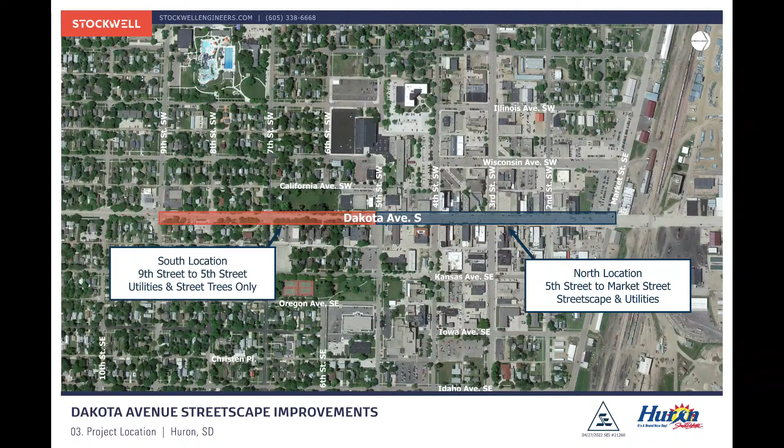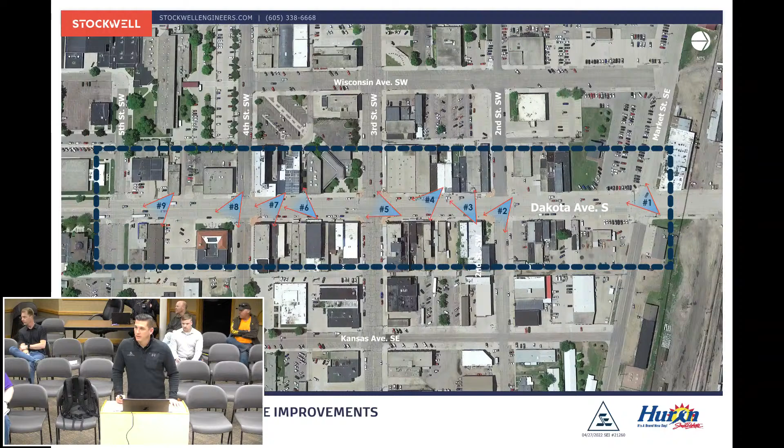So just a quick recap and look at the downtown area. You guys are all very intimately knowledgeable of the downtown area, so I know these pictures aren't any surprise to you. But just, again, from a public standpoint this evening, to reorient people: we're looking at downtown Huron, buildings coming up all the way to the right of way, giving you that sense of enclosure in your downtown area, shop windows. We know there are overhangs, there are signs.

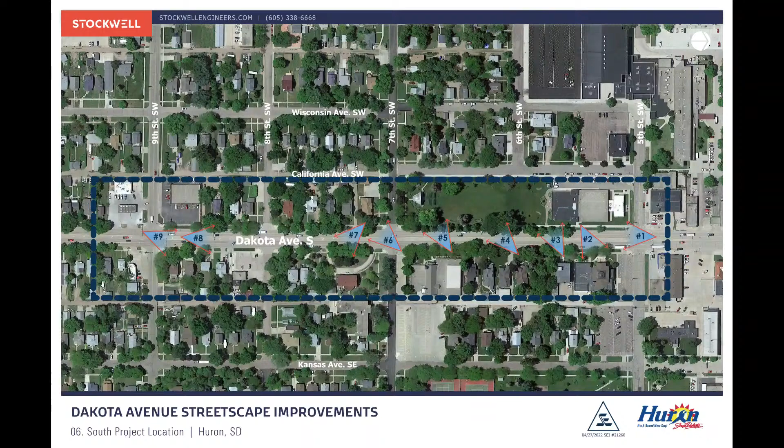Downtown is busy, and so the design will need to be accommodating to that. What we're going to look at here is more of a one-block prototype that will be specifically applied from block to block—whether it's signage that we need to make sure we're not in front of, or basement protrusions. There'll be different elements in each block that are unique that we're going to have to work around, and we're certainly going to be doing that as part of the design. The area we're looking at is from 5th to 9th Street.

This area in particular, people really like the tree-lined drive, and that's probably the biggest item of contention with a lot of people. So as a part of this project, we want to help re-tree this corridor.

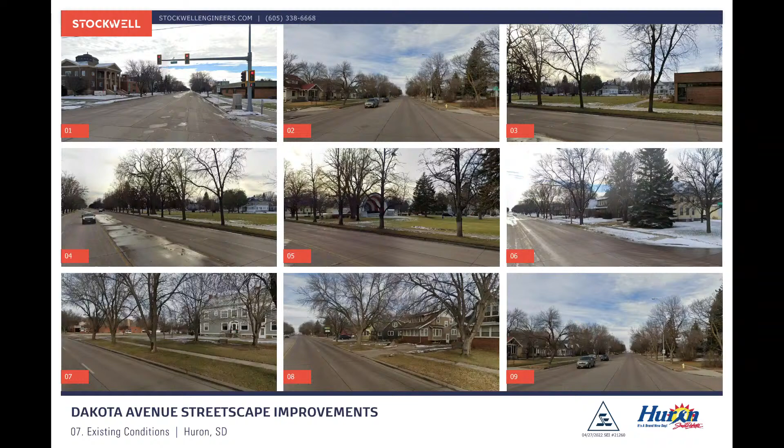We're going to be showing where we're starting to preliminarily think about where those trees go, but also looking at what types of trees are going back. We want to make sure we have a good, diverse urban forest.

We don't want to run into a situation like a lot of South Dakota is in right now with green ash. It was a variety of tree planted very heavily back in the day, and now with the emerald ash borer, entire corridors and parks that people thought of as forested are now not. So when we replant this corridor, we want to make sure we're coming back with a variety of different trees.

Sienna Glen maple provides some nice red fall color, because a lot of the trees that are hardy and do well in this area typically have a lot of yellow fall color, so we want to introduce some red. And then Triumph elm—there's a variety of hybrid elms that are Dutch elm disease resistant, native elms, very adaptive. We've had very good luck with a variety of different elm trees that would be installed as well.

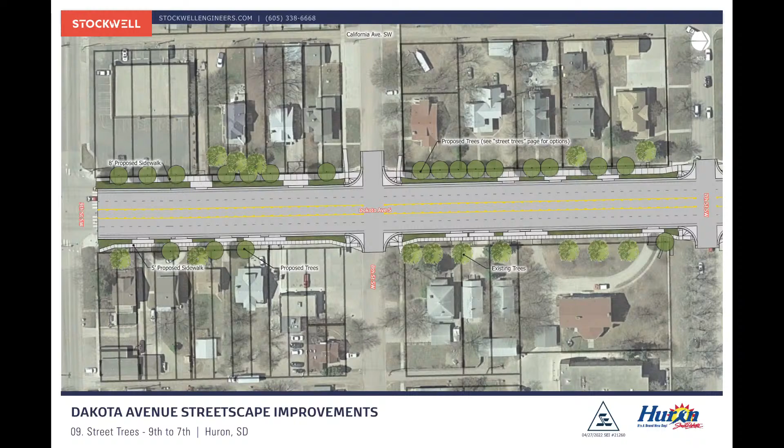And as for where we're putting them, we're starting to conceptually lay this out so we can begin the conversation with the different property owners along the way.

On the plan, the left side—the west side of Dakota Avenue, top of the slide—there's going to be a widened sidewalk on that side, and trees will be placed closer to the different property owners. That's an agreement we'll need to work out with property owners regarding planting right at that edge of the right of way, just on their property, to start growing back that urban canopy that comes down Dakota.

On the east side, we're doing a not quite as wide sidewalk, more of a typical sidewalk, which allows more space between the edge of the sidewalk and the right of way. So there's a little more room to work in terms of planting trees on the back side of the sidewalk on the east side.

Again, we're going to be upfront and work with the property owners on that, because if a property owner is against it or not going to take care of the tree, that has its own issue—we don't want to plant trees that are set up for failure. So we want an open dialogue with people as we think about where those trees happen along the corridor.

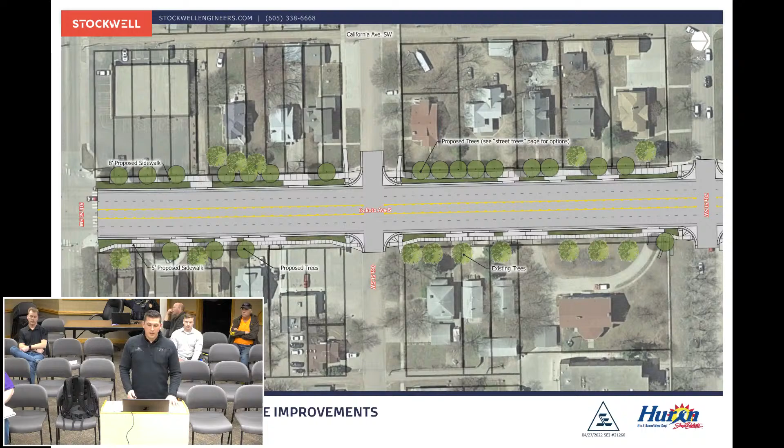Right now, you've got a tree every 30 feet or so going up and down Dakota Avenue, which is pretty tight spacing, but that's also what gives you that sense of enclosure as you drive down it.

So we did these at about 40-foot spacing—spacing them out a little more, but we can plant more trees or fewer trees. We're just starting to lay it out to give people a visual of what that could look like, and to let people know we're not forgetting the comments people gave about wanting to see that in the future.

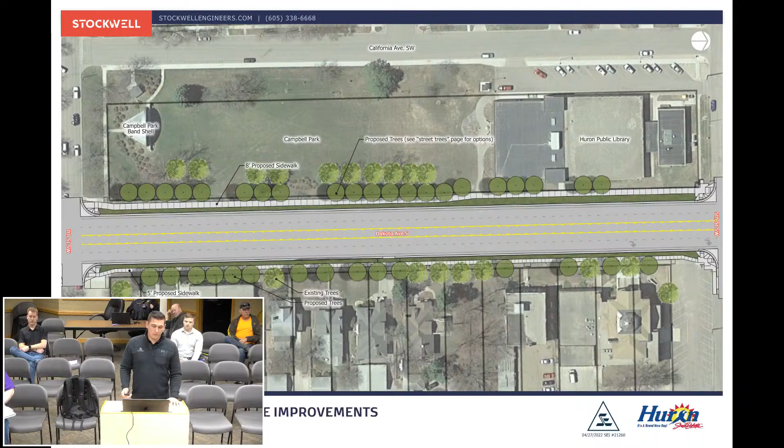From a maintenance standpoint, we want to make sure we're including items that can be maintained long term. Lighting, I know you guys have been talking about already, so we're going with a hybrid, a Bemidji style light. We've incorporated that light style into the graphics, and that fits the hybrid role, not going full decorative like the acorn lights you see in a lot of downtowns, but also not doing the Cobra Head DOT lighting.

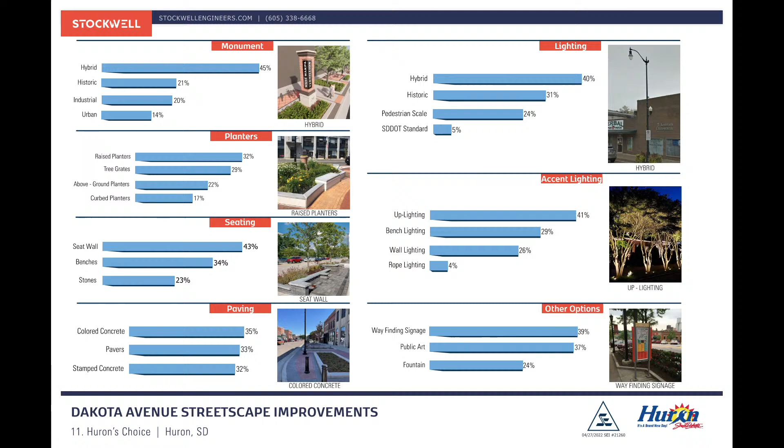And then accent lighting, we do a lot of tree up lighting. It looks beautiful in the evening. That's the one people really liked as part of it.

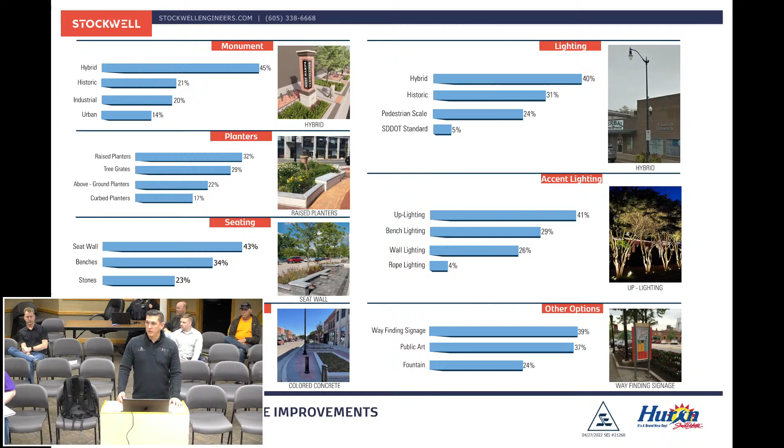The elements we just went through are, I don't want to say standard, but something you'll usually find in a downtown area. So what are some other opportunities people wanted to see? Wayfinding signage and public art were by far the top two. I think public art was a big discussion we had, so seeing those two at the top makes sense in terms of the discussions we had.

We also talked about what makes Huron special. When you think of Huron, what is it? Culture was by far, I'd say, the most talked about - culture, diversity, understanding the industrial nature, the railroad, the industry that supports the community.

As we started to look around, familiarizing ourselves with the community and looking at different pictures, there's some historic architecture, some nice elements within the downtown area that we want to tie into architecturally. You start to see the intricacies of the brick patterns or the reveals in the different buildings - unique elements we want to try and capture as part of some of the designs.

These are the materials we started to put together as part of our palette to look at. We're looking at weathering steel, which ties in with the economic or industry heritage there, utilizing pavers, colored concrete, and also native landscaping - a more prairie style approach, ornamental grasses, some perennials, again to tie in with the surrounding landscape. You see an image there of accent uplighting, benches, trash receptacles, bike racks, cast stone benches. So we're putting together our palette of materials and products you're going to see implemented into these different concepts.

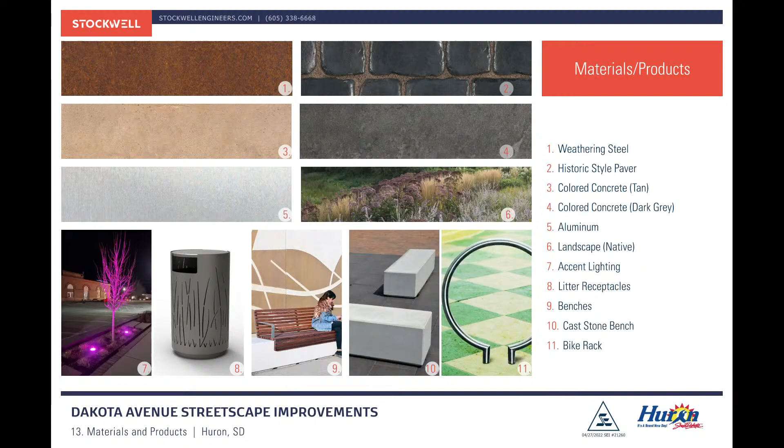As I said, public art is something we talked about quite a bit. So you'll see in these different concepts, locations we've identified as art locations, whether it's something placed within the landscape or something with a pedestal to it. As we get more towards the end of the presentation, we'll show ideas for incorporating unique elements, whether it's with the wayfinding signage or benches - different etchings, whether tying in with the ecology of the region or the diversity of the region.

There's some ways for us to put in some subtle elements into the design, but also there's a sculptural element to it, and working with local groups to maybe have a call for art pieces. One that I really like, which I think has been unique to see, is unique to South Dakota: an artist who utilizes found objects and makes them into really unique and beautiful pieces of art that reuse materials from farmsteads. You can see some images there. He's done tigers, buffaloes, horses, but maybe that's something where you have different pheasants made out of this material as you go through Dakota Avenue.

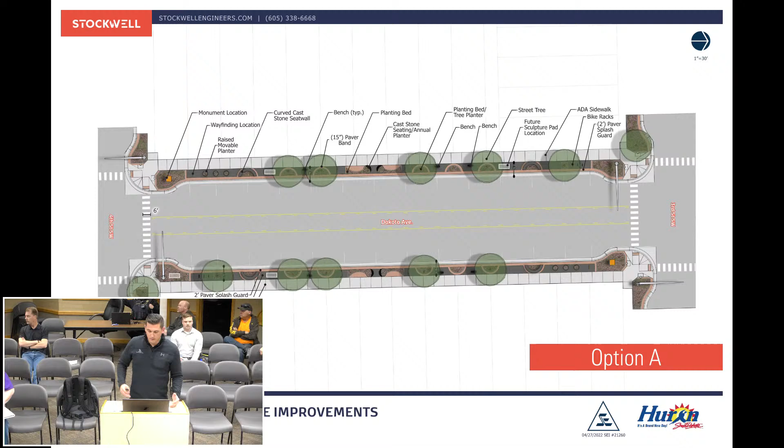So this is a prototypical block. I know on the plan we label it as, okay, Fourth is on the left and Third's on the right, but we're not saying this is specifically where the trees are going or where the planters will be. This is more of, okay, in your downtown, here's what we're looking at.

Item number 1 is a cast-in-place concrete curb, but along the street side we're changing that material to a weathering steel edge—about a half inch thick, with eased edges so it's not sharp. It's a nice, thick, almost steel curb along the planters by the roadway. A couple of reasons for that: it adds an accent element, so as you're driving by you can see the change in material from concrete to weathering steel. Also, a lot of salt happens in winter, and salt can eat concrete, but steel can hold up over time as long as it gets good oxidation.

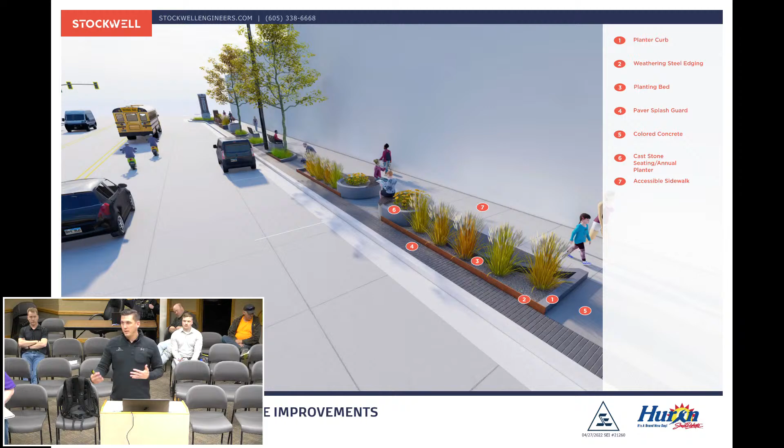You see the planter there, item number 3, with some landscaping within it. The pavers, item number 4, run the whole length along the back of the curb between the planter and the curb area, providing space for someone to get out of their vehicle and walk between the vehicle and the planter to reach the business or the ADA-accessible sidewalk, labeled number 7. Number 6, in the middle, are raised planters with an associated bench. Those planters are opportunities for perennials or flowers, or annuals that get changed out by staff on a regular basis.

So again, here's another graphic showing the difference of the paver along the back of curb, colored concrete, then between the paver and what is considered the ADA accessible sidewalk, which runs along the side of the building there. This planter in the foreground would be a raised cast stone planter, at a sittable height, so 18 inches, so someone can sit on it.

It then raises up the height of the steel edging that faces the street. As we get further on in the presentation, we see that as an opportunity to create some unique artistic elements within the design. You see the bike racks a little further down in the image. We've kept the bike racks on the corners of the design, so that whether it's a cross street, it provides a touchdown area for the bikes and then walking into the mid-block areas.

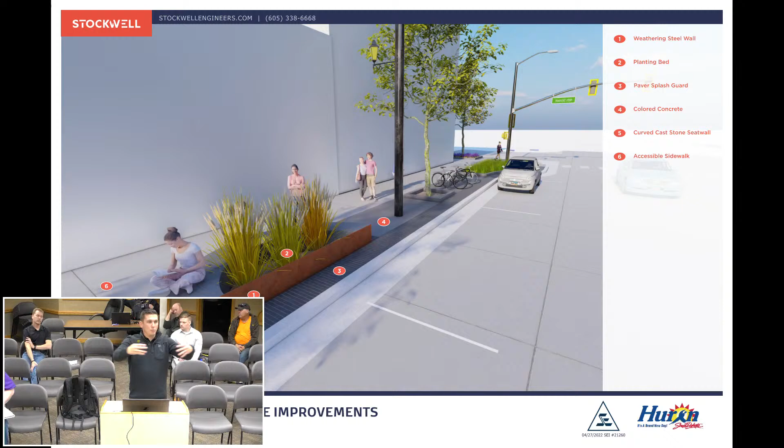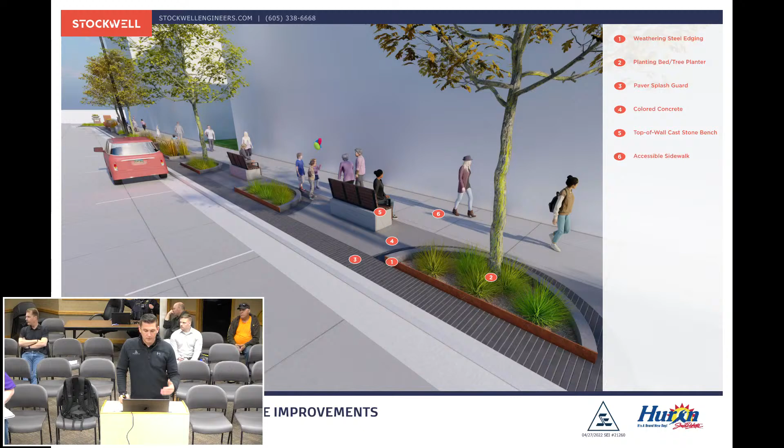Again, an image here of the different elements. You can see the weathering steel in the front. An opportunity, number 5 there, is to have a cast stone bench, but then also have a sittable bench on top of it with arms and a back to it. So again, a unique element that's got more of a stone-based design with a bench on top.

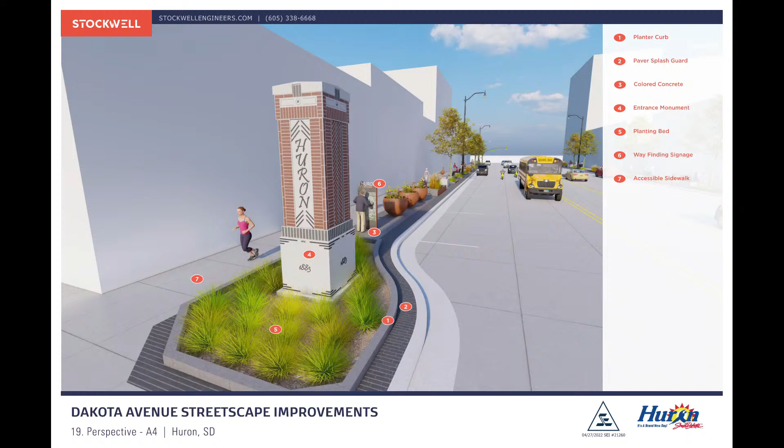And then behind it, you can start to see incorporating some wayfinding opportunities as well. Obviously, we don't want to have one of those giant monuments at each intersection, from a cost standpoint, but also because we want to use those marquee elements to highlight the edges of downtown.

So at some of the middle block intersections, there's an opportunity for maybe a little bit smaller monument that has maybe the street names on it. So this says 4th Street. Or maybe it's something that incorporates the Huron logo on one side, or it's a 'brand new day' on one side. There's a variety of different things we can utilize for those cast stone elements, and then having a planter on top of it that can be switched out with annuals.

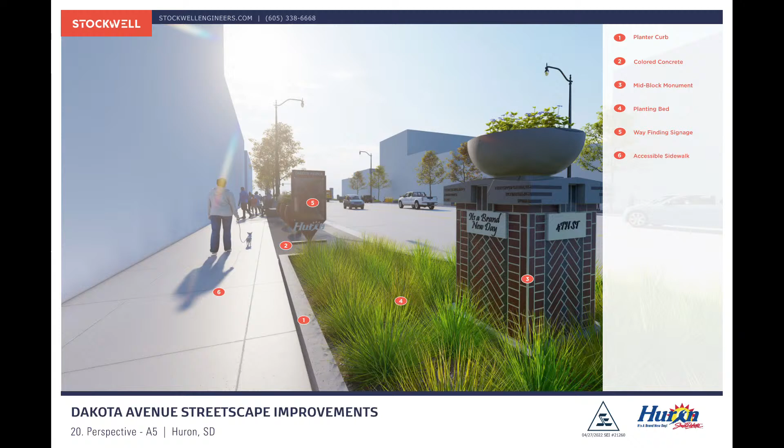So again, just a graphic looking down on top of the design.

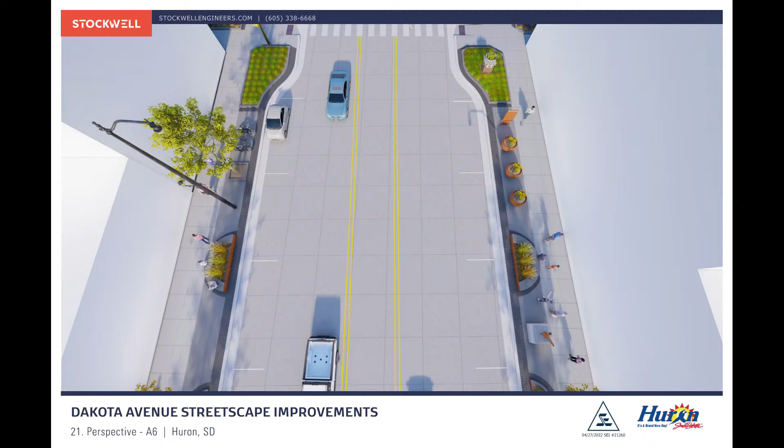So option B, I can come back to this, I just want to get it through so you guys can all see it before we open it up for discussion.

So option B, I'd say it ties in more with the industry part of it as well. Not so much the shapes of the James River, but utilized more of a rectilinear approach to the design. We simplified it a little bit—we got rid of the pavers and just did all colored concrete.

But then what we did is we utilized stone as an element within the landscape areas, tying in with the ecological area around Huron, utilizing the field stone. We're not tying this one to the James River, we're tying this one more to the materials that you see in the area, so utilizing that as an accent.

Again, a lot of the same other elements, whether it's bike racks, trash receptacles, sculpture locations, what type of monument could look like. But again, it's a different rearrangement of those elements and a different shaping of the different elements.

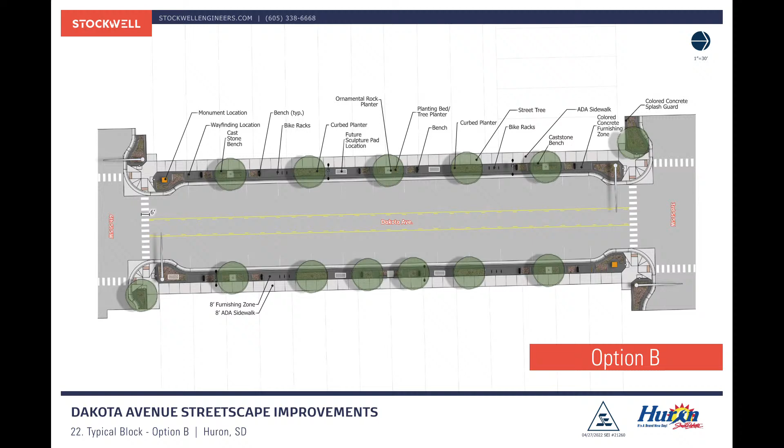So this is more of a rectilinear approach as opposed to the curvilinear that you just saw. On this one, you can see the rectangle tree planters, landscape planters. We did away with kind of the steel edging on this one and focused more on utilizing just a concrete curb to help frame the landscape areas. Couple reasons for doing that, whether it's option A or option B.

First off, it kind of raises the plants up a little bit, not quite to the height of sittable, but raises it up 6 to 8 inches to keep some of the natural salt from going in there when people are putting salt on the sidewalks. But also from a snow removal standpoint, it helps delineate where those planters are as well.

With this design too, we would be utilizing cast stone benches for seating opportunities. There you can see kind of utilizing some of the field stone rock as an element, a material change within the landscape. This one doesn't have a tree associated with that, but there are other ones that you would see that have a tree with it.

And then kind of in the background, you start to see sculpture pads that could be incorporated into the design. So there you can see kind of more in the foreground, the sculpture pad location. Again, you can see from a texture standpoint that it's a little simpler, just utilizing the colored concrete as opposed to the colored concrete and the pavers.

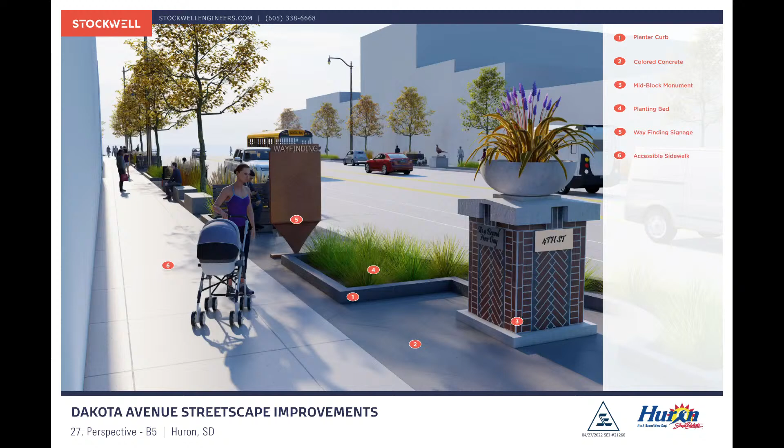Again, just kind of another graphic showing what that looks like as you come up to the intersection. Or could look like, I should say.

So here you see some of the monuments that we've already shown you guys that we've been talking about, one that ties with more of the historic architecture on the left-hand side, and more of a tying in with the heritage, cultural, the industry elements on the right side with those panels that could be interchangeable. The white is something that would glow in the evening time then.

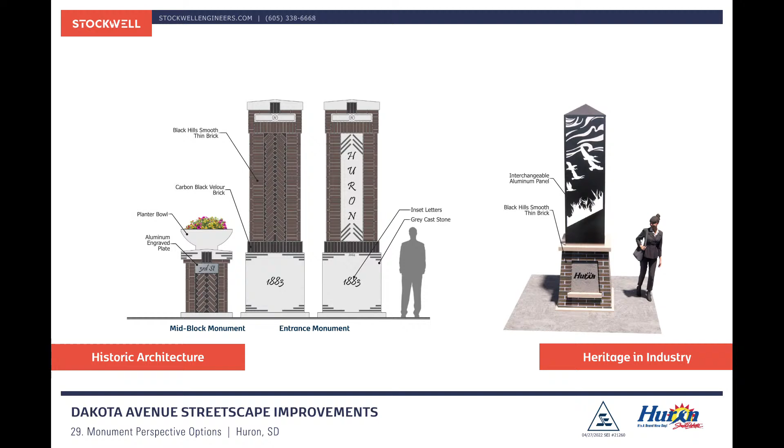Wayfinding—there's a variety of different ways of doing that. You can put as much or as little information on those as what you guys want to. So we did a couple different ideas or options for it.

On the left side, it's got kind of a unique shape to it in terms of it tapering down at the bottom, but incorporating the logo with more of just kind of a larger map on it.

The traditional one in the middle is kind of more like a wind vane, so you have the arrows. Depending upon where that post is, you could have arrows that point to different marquee elements within the community—whether it's 3rd Street Dam, library, Campbell Park, City Hall. You can put those pointing all sorts of different directions to quickly say, okay, I got to go that way for the library, so to speak.

Very simple. The top part then, we thought could be cutouts of a pheasant that would turn with the wind. And since it's never windy, I don't think it would ever turn. But either that or it might go fly right off. Who knows?

But I think we can get Wall Drug to pay for that. Right, that's true—Wall Drug, 300 something miles that way.

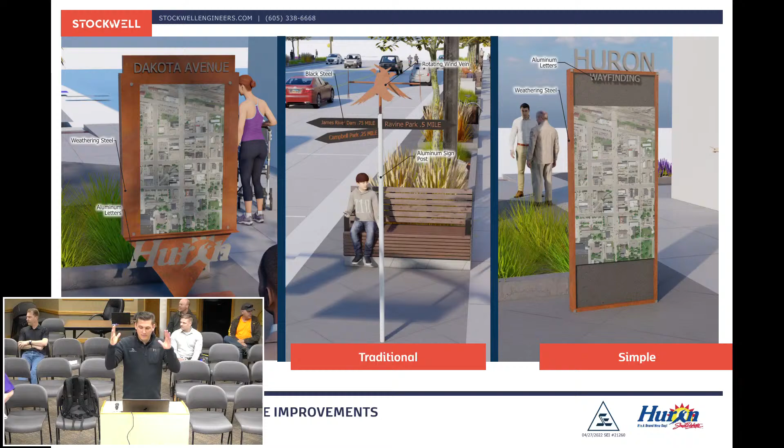Right, yep. And then on the right-hand side, again, simple is just what we called it, but just kind of tying in with putting the Huron on the top, wayfinding, and then just having a simple map graphic associated with that. There's a variety of different options of what could go on those different graphics.

So again, we just wanted to show you guys some examples, whether it's maps on the left-hand side showing kind of the outline of downtown and the buildings and where you would need to go to—what we kind of showed as the traditional one, with the arrows pointing in a variety of different directions—or more of an infographic approach, having different icons and utilizing icons and directions as opposed to maps in the area.

Obviously these designs also could have community information location associated with it, whether it's community announcements or events—a panel that could also inform the public of different things happening.

So tying into some of the diversity elements, and also some of the unique elements for Huron, here's some ideas that we had for incorporating some of these unique elements into the streetscape—whether it's associated with the weathering steel, the curb, the wayfinding signage, the cast stone benches or panels within the different monuments.

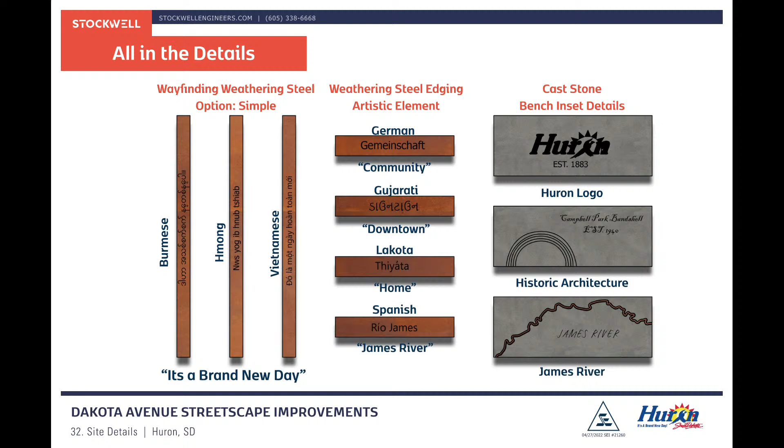Again, we started to think about where those elements occur. This is just our initial stab at it. I know we've talked about Fifth to Market as being the downtown area, but in terms of some of these more intense design elements, or that image of those two different streetscape options, we want exactly that.

I see that probably happening more between Second and Fourth, and then somewhat of a lesser version of that from Fourth to Fifth and from Second to Market. So I think your more intense streetscape elements will be Second to Fourth.

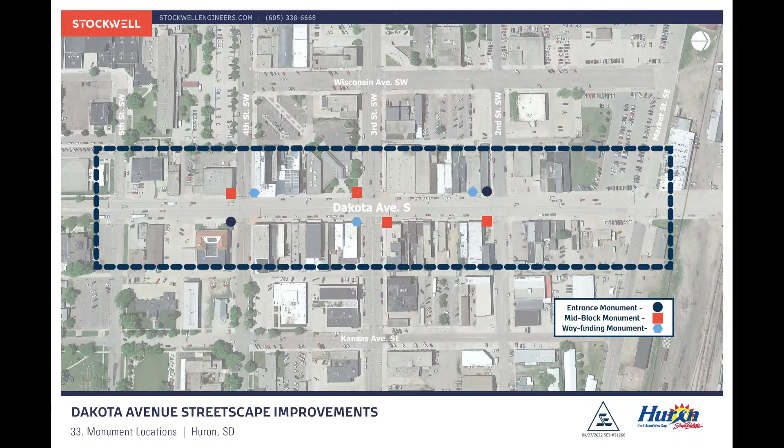And so for an entrance monument, we want to look at where it makes sense as you're driving in, but also where it would stand out from a driving standpoint. We're looking at signal poles and which corners they're located on, because we don't want to put a downtown monument right next to a signal pole, as it kind of takes away from it. So we strategically placed them where we thought it would make sense.

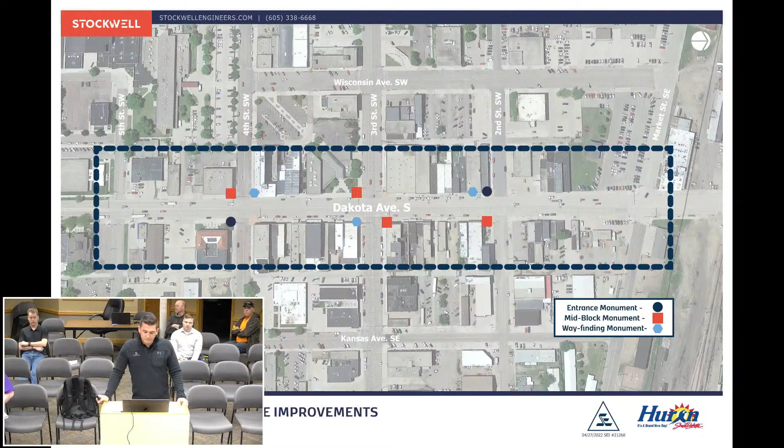That's still, I'd say, to be determined and certainly up for discussion. But again, it's something that we started to put together.

We incorporated some feedback from staff, so we made some changes to that. We did incorporate irrigation into the design as well to help with keeping the plants nicely watered, but it also helps with flushing the salts out of the plant beds in the spring.

One thing that's not included in that cost - because we didn't want it to skew one option one way or the other - is the monument costs. Because if we do a downtown monument, that's going to be only on one end or another. So these costs do not include the downtown monument or wayfinding signage, because that may or may not be part of a specific block in this area.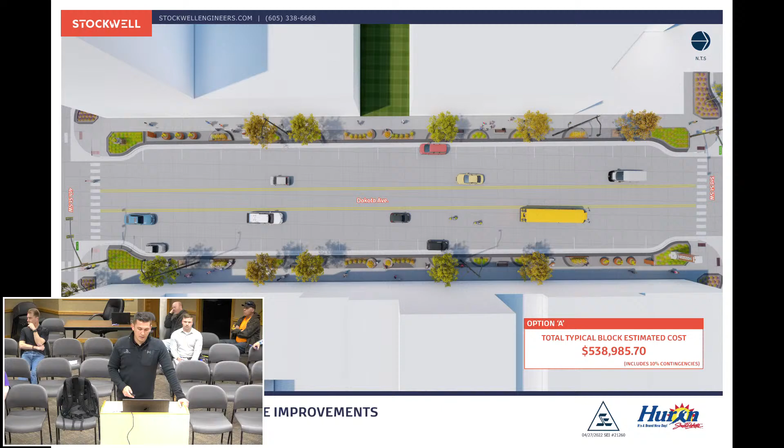So all in, for this block it's approximately $540,000 above and beyond what would be considered a DOT standard concrete roadway. Option B is a little bit less, obviously, because we don't have the pavers.

Not doing pavers helps with that cost. We don't have quite as much of the curvilinearness of the benches, or the weathering steel curb. I'd say option A has some more of those unique elements, but unique elements come with a cost, and that's why you see option B being a little bit more cost effective from a budgeting standpoint.

Does that include lighting in that cost too, or is that still separate? It includes the uplights, like for the trees, but it does not include the street lighting updates.

Questions, comments? So tonight, just so you're aware, we're going to take the costs off of it, because people kind of fixate on that when they make their decisions. I mean, it is an important decision factor, but that's for you guys to make.

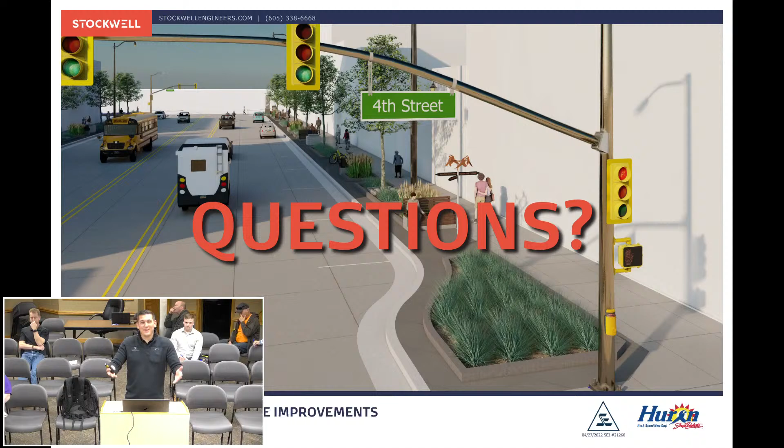So tonight, after I go through this presentation, we'll have boards set up with a collage of these different slides put together - one board with all the option A stuff, one board with all the option B stuff, one board for the monuments, and one board for the trees, so people can see where those are happening.

And then we're going to be giving everybody 3 dots, and we want them to place a dot on the concept they like best. So at the end of the day, we should have a good count in terms of which option they like the best. We'll also have sticky notes and pens so people can write down comments.

We want them to put comments on the design so we can catalog it at the meeting, but we'll also have comment cards available for people to fill out if someone was unable to attend, and then email or mail those back to us.

Is there a history element involved anywhere, like the history of the city of Huron? I guess not specifically in terms of telling that story. I think the focus in terms of the elements was more on pulling the historic architecture and looking at the region from an ecological standpoint. But we did have the established date, 1883, for Huron on there. In terms of specifically telling the history of Huron, we did not have that as an element. Having said that, that's certainly something we could incorporate into the wayfinding signage.

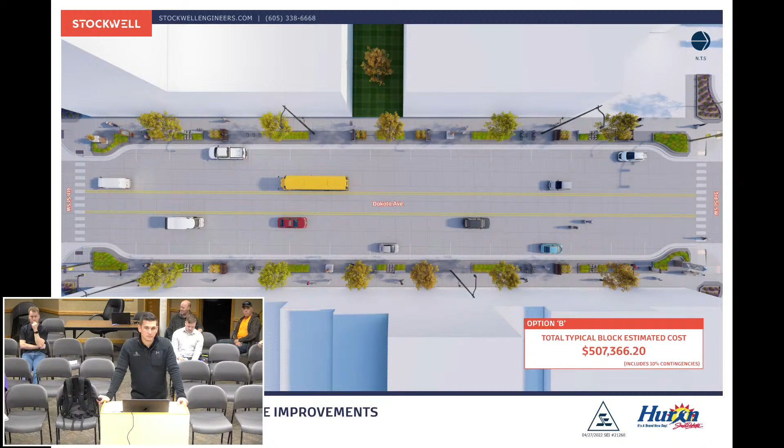So maybe one side is a map, and the other side has a graphic spelling out the history of Huron. Coming up with some of those more graphical panels is certainly something we could do, because whether it be the railroad, the college, or our packing corp element, that's what has risen this community up as it is.

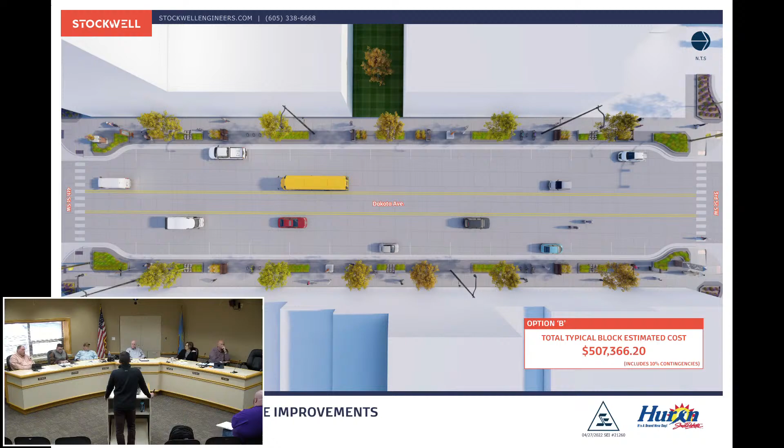How much of the cost difference would you say is because of the concrete versus the pavers? Are you talking between option A and option B? Yeah. I'd say a lot of that is the pavers, but also there's less cast stone in option B from a planter standpoint, and it doesn't include the weathering steel. We've done that before, and it's more costly than just doing a concrete curb. So it's not one specific item, it's a conglomerate of the differences between the designs.

And that's a concern, because I felt like this was a concern after our last meeting. So we're going to give people two options, say put a dot on it. But what if I hate the weathering steel but love the curve, and I hate the pavers but love something else—where do I put my dot? It's all over the place. I think we heard a lot of feedback from that at the last meeting too—people said, I was supposed to pick A, B, or C, I didn't really like any of them, so I just picked one.

Then we get a result back and say this was the top vote getter, when really it's kind of a toss-up. I know you said you'll have Post-it notes for feedback too, but that would be my only concern with throwing two options and saying which do you like better, A or B—there's going to be elements of both that people like.